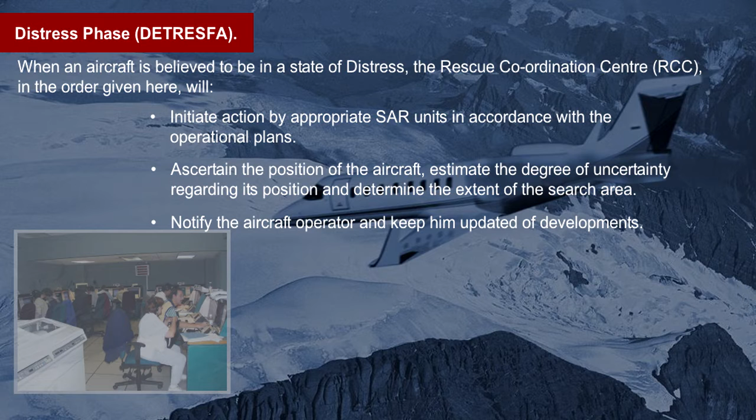Notify the aircraft operator and keep him updated of developments, notify adjacent RCCs who may be able to offer assistance or are concerned with the incident, notify the air traffic service unit of the situation if the information has been received from a non-aviation source.

Request at an early stage vessels, coastal stations, or any other assets to maintain a listening watch for any distress transmissions from the aircraft or emergency locator beacons, and keep those services informed of the search and rescue requirements.

Assist the aircraft in distress as far as possible, from the available information plan the conduct of any search effort, and communicate that plan to the search and rescue units, notify the state of registry, notify the appropriate accident investigation departments.

When a pilot in command intercepts a distress signal, message or transmission, he shall record the position of the craft in distress, if possible, take a bearing on the transmission, inform the relevant RCC or air traffic service unit of the distress transmission, and at his discretion, whilst awaiting instructions, proceed to the position of the emergency call.

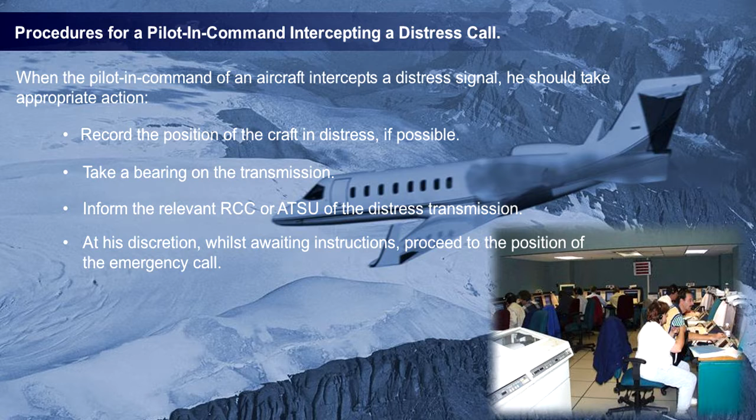When a pilot in command observes that another aircraft or surface vessel is in distress, he shall, unless he is unable, or given the circumstances it is unreasonable, unsafe, or unnecessary to do so, keep the aircraft in distress in sight until his presence is no longer needed.

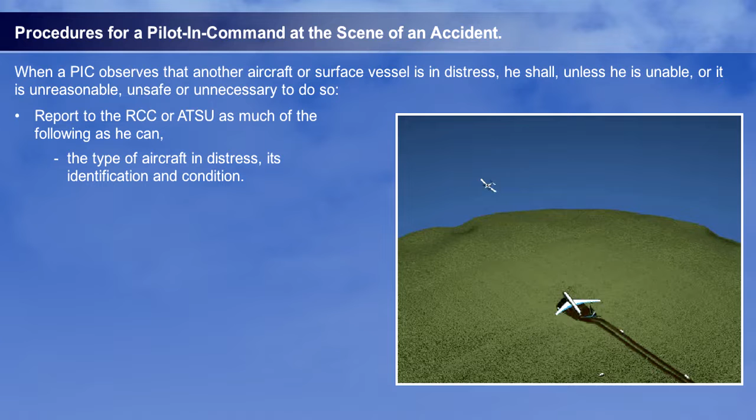Take such action as is necessary to determine the position of the aircraft in distress. Report to the RCC or Air Traffic Service Unit as much of the following as he can: the type of aircraft in distress, its identification and condition, its position expressed in geographical coordinates, radio navigational fix or distance and bearing from a known landmark.

The time of the observation, the number of observed survivors, the number of observed life rafts and occupants, the apparent physical condition of any survivors. Act as instructed by the RCC or Air Traffic Service Unit.

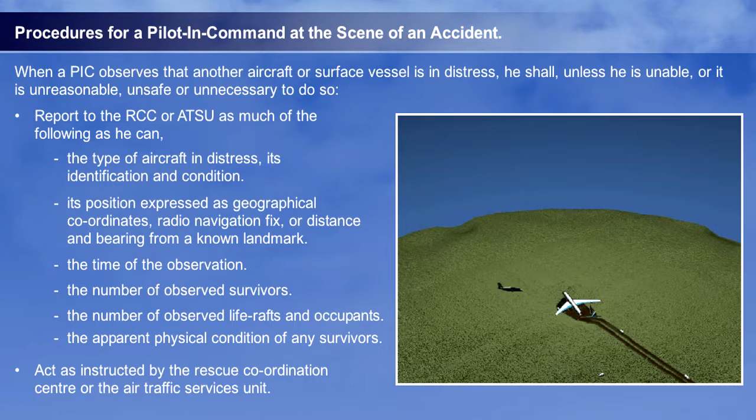If the first aircraft on the scene of an aeroplane crash is not part of the search and rescue effort, then he shall assume responsibility as on-scene commander of all subsequently arriving aircraft until a dedicated search and rescue aircraft arrives. Should he not be able to communicate with the RCC or ATSU, then he will pass over this responsibility to the first aircraft to arrive that is able to do so.

It may be necessary for an on-scene commander to communicate with surface vessels and direct them to the scene of an aircraft in distress. Aircraft should do this by transmitting by any means at their disposal. Maritime frequencies can be used, but if no direct means of communications can be established, visual signals may be used.

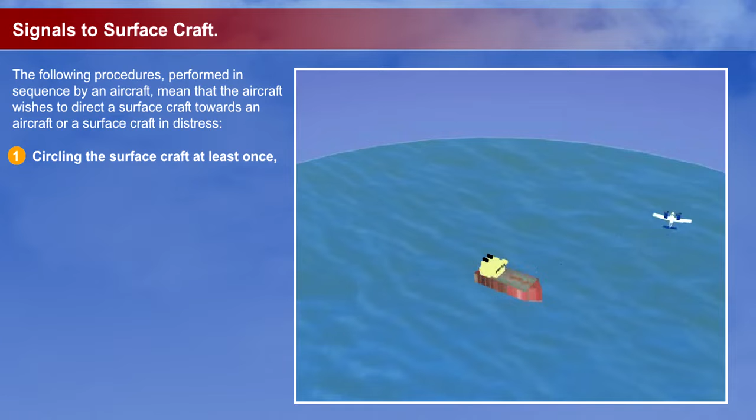The following procedures, performed in sequence by an aircraft, mean that the aircraft wishes to direct a surface craft towards an aircraft or a surface craft in distress. Circling the surface craft at least once, then crossing the projected path of the surface craft close ahead and at low altitude, whilst rocking its wings, or opening and closing its throttles, or changing its propeller pitch. Then heading in the direction in which the surface craft is to be directed.

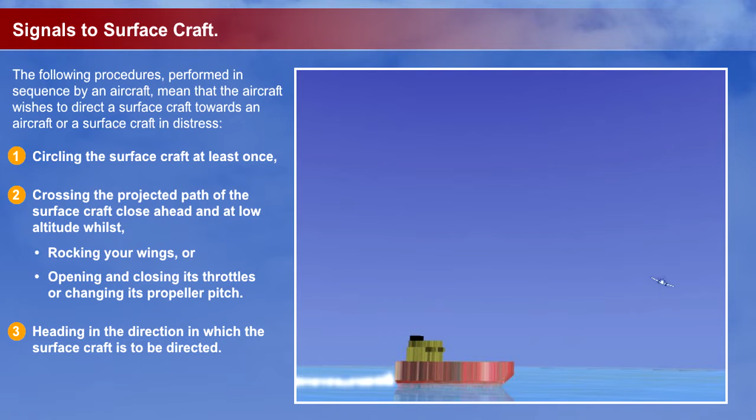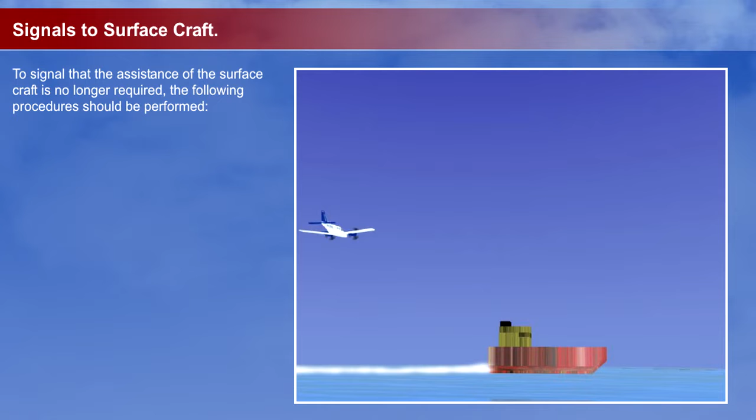To signal that the assistance of the surface craft is no longer required, the following procedure should be performed. Cross the wake of a vessel close astern at a low altitude, whilst rocking your wings, or opening and closing the throttles, or changing the propeller pitch.

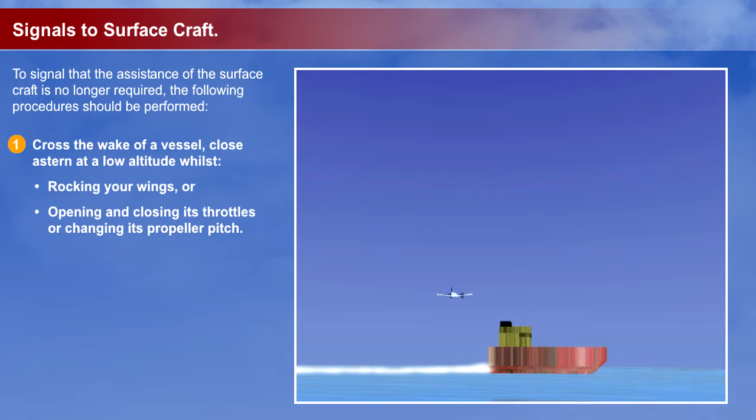Communications with survivors on the ground is treated in the same way. The on-scene commander must try all means to achieve direct communications. But if this is impossible, then the use of ground-to-air and air-to-ground signals are employed.

The internationally agreed search and rescue signals which follow are only used for the specific meanings assigned to them. The instructions they convey should be acted upon when observed. They are as follows. Firstly, ground-to-air signals from survivors to aircraft.

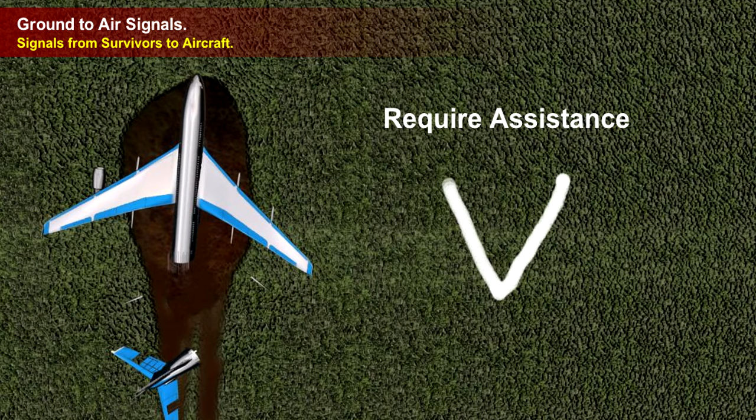We or I require assistance. We or I require medical assistance. No or negative. Yes or affirmative. Proceed in this direction.

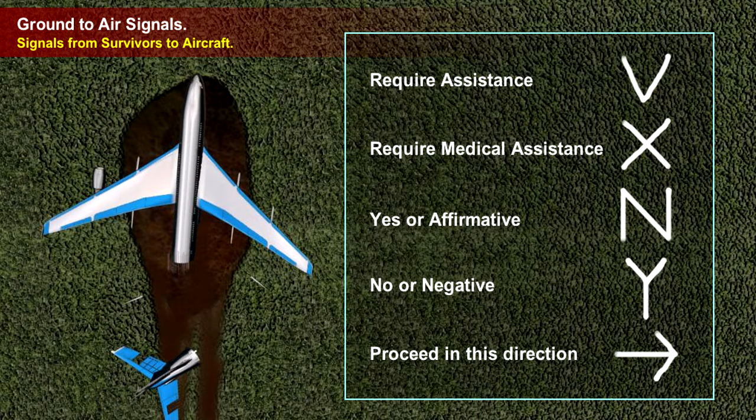And ground-to-air signals from search teams to aircraft. The operation is completed, we have found all personnel. We have found only some survivors. We are not able to continue, returning to base.

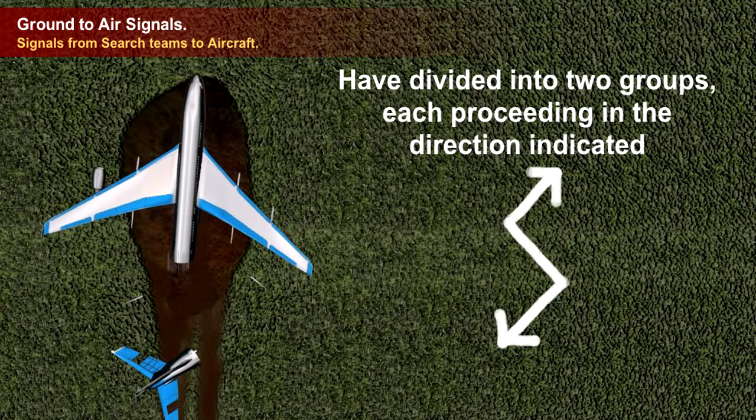Have divided into 2 groups, each proceeding in the direction indicated. Information received that the aircraft is in this direction. And nothing found, will continue the search.

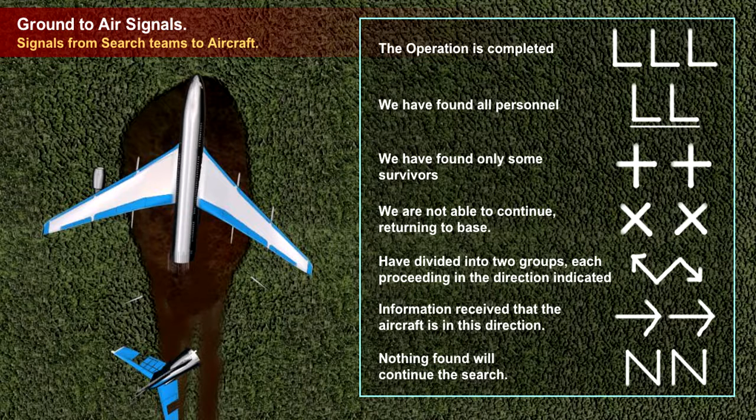Rocking your wings or switching on and off your landing or navigation lights indicates that ground signals have been understood.

Packaged up supplies can be dropped to survivors, and the content of such packages can be conveyed by the attachment of coloured streamers. ICAO document 7333 specifies the following.

Red signifies medical and first aid supplies. Blue signifies food and water. Yellow signifies blankets and protective clothing.

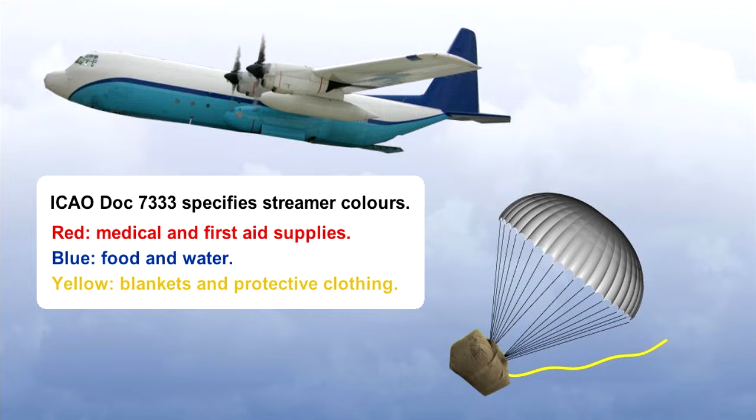Perhaps the most important role that a non-specialist aircraft may play in the initial stages of an unfolding search and rescue operation is that of relaying communications.

Dedicated SAR aircraft will carry sophisticated communication systems: VLF, MF, HF, VHF, UHF and SATCOM. However, a civil aircraft carrying perhaps HF and VHF is still a useful communications platform and can relay messages via the RCC or Air Traffic Service Unit.